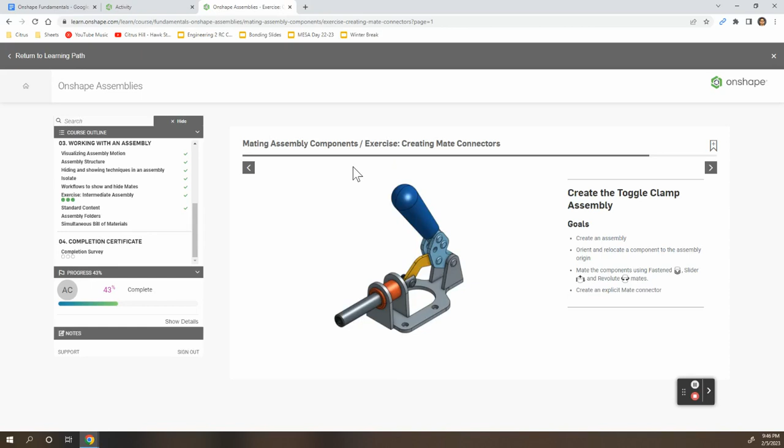So this is our second video for Onshape Assemblies. We're going to go ahead and create this clamp right here. And this is our exercise at creating mate connectors. For step one, go ahead and click on this link and make a copy of this document. For step two, we're going to go ahead and click on this icon here, and then we're going to create an assembly. So let's click on here, insert new element. We click on create assembly.

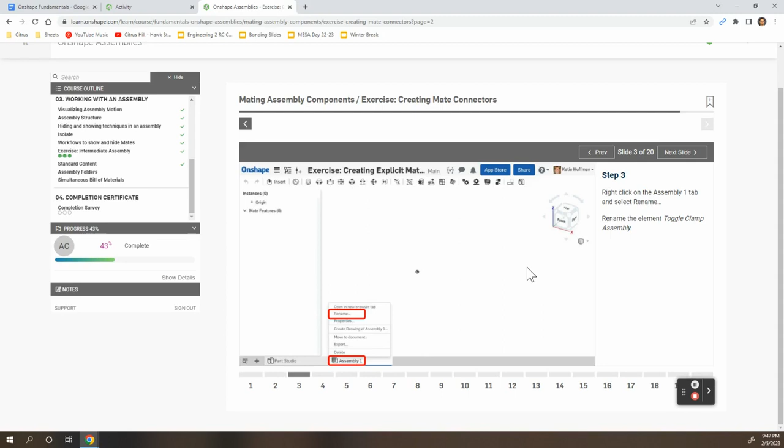For step three, we're renaming this assembly to read toggle clamp assembly. So right click on assembly one, click rename, and type out toggle clamp assembly.

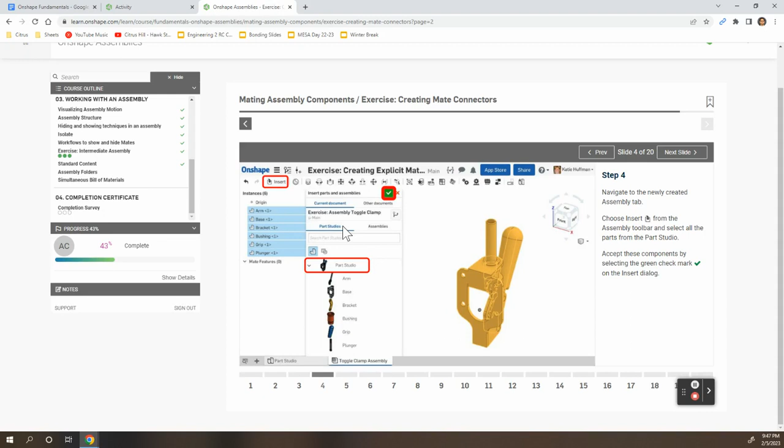Step four, we're inserting our part. So go ahead and click on insert and click on part studio. Now we're going to accept by clicking this green icon here. By clicking on the green icon, our objects will be placed just like how they're placed in the part studio.

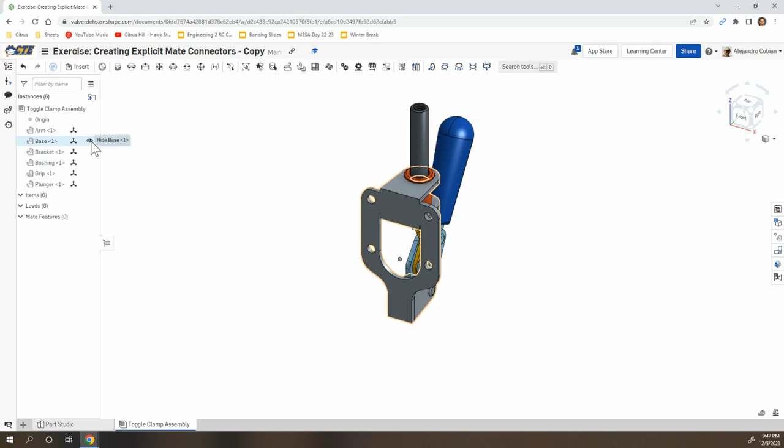For step five, we're going to place this triad manipulator right at this location. So if you want, you can hide everything else by clicking on this eye right here, but we want to do the base, so I'm not going to hide anything else, so we're good to go. So you're going to click and hold onto this circle and drag it around to one of the edges. You're going to hold shift, and then you're going to move the icon down to this location here.

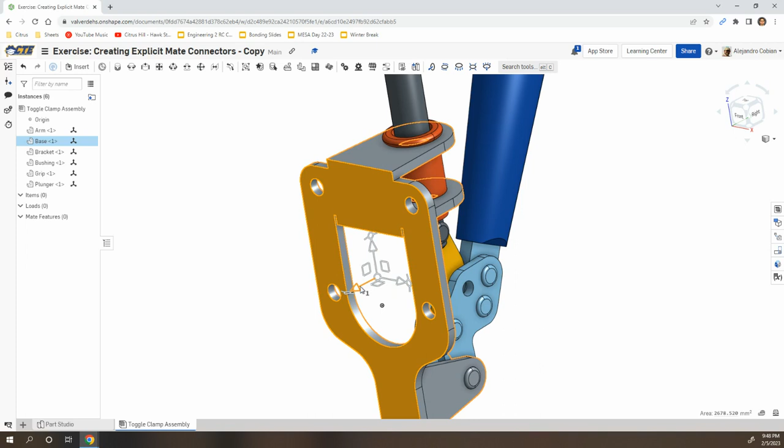For step six, we're going to right click on this arrow that is pointing away from the face of the base. So this is pointing towards the front. So right click on this. In this situation, we're going to make sure that our arrow is going to anti-align with Z. So click anti-align with Z. This is now our top face of the base. Now this is the bottom face of the base.

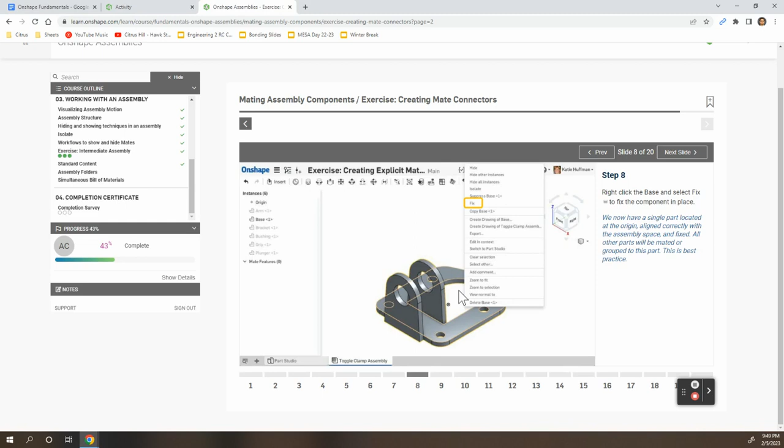For step seven, we're going to click on the circle, right click, select move to origin. For step eight, we're going to click on the base. So right click on the base and select fix. So at this point, we can move every other component. And the only one that we cannot move is this base here.

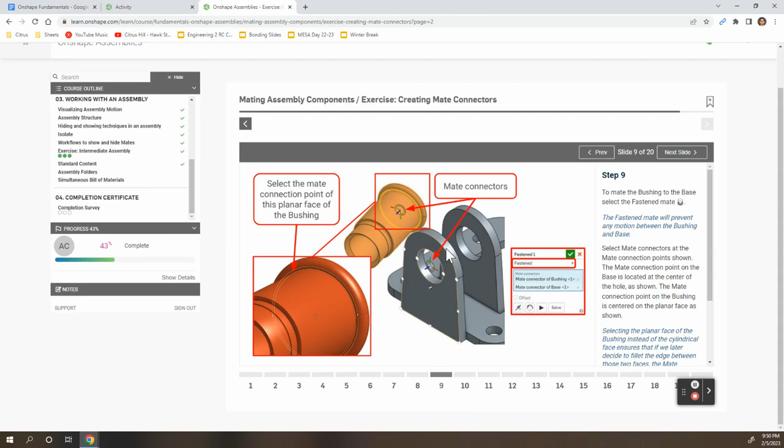For step nine, we're going to place this orange piece right inside of here. So this is our bushing, and we're placing it inside of the base. So let's zoom in into our bushing. So what we want is to select Fastened mate. So let's hover over this, hold shift, and then click this icon here.

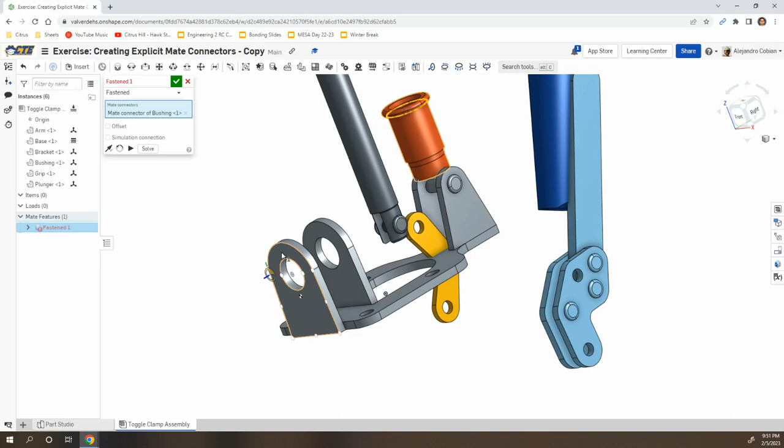Now we're going to go in this area here. We're going to hover over this face, hold shift, and we want to place our mate connector here. So in this situation, we want this bushing going towards the inside, so let's just flip it and accept. So now we're good to go. So for step 10, notice I just had to flip it, and we're good.

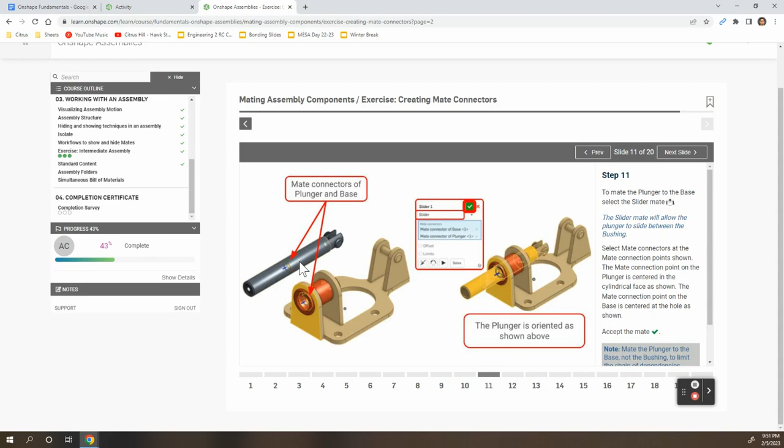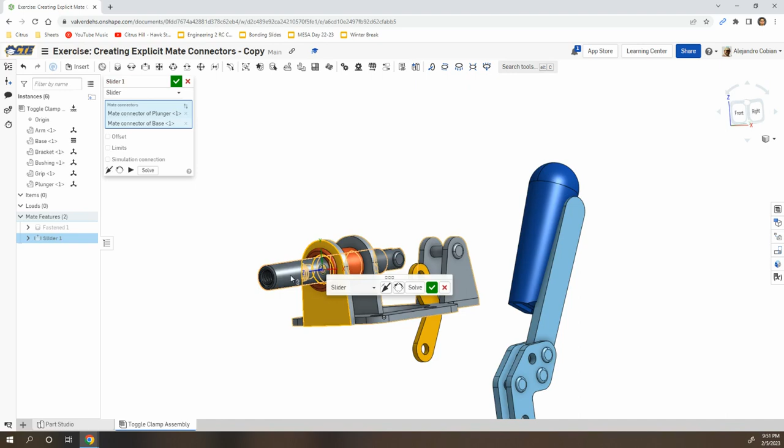For step 11, we're using a slider mate to connect this cylinder inside of our bushing. So at this point, let's click on slider mate. So we're going to select this centerpiece right here. And now we're going to hover over this base here. When we hold shift, notice that I'm on the base and not on the bushing. And I go in the center right there. And then we accept this mate.

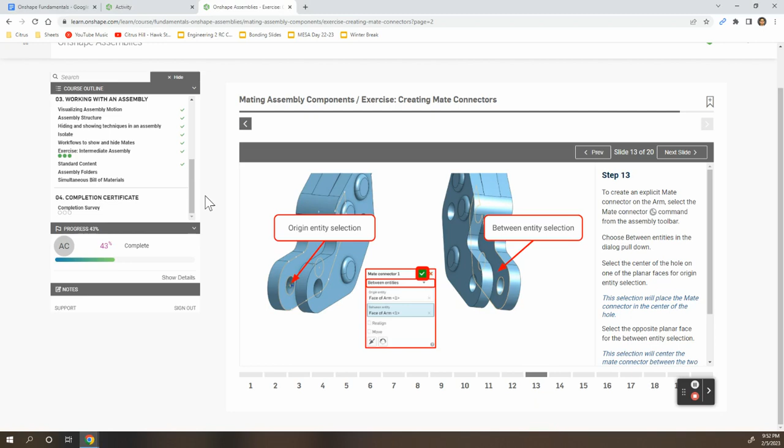For step 13, I'm going to place a mate connector at this location right here. And then I'll use that mate connector to connect this handle onto our base. So to do this, we're going to select mate connector. So click on mate connector. Let's rotate. We're going to look at this piece here. We're going to select between entities. So change this to between entities.

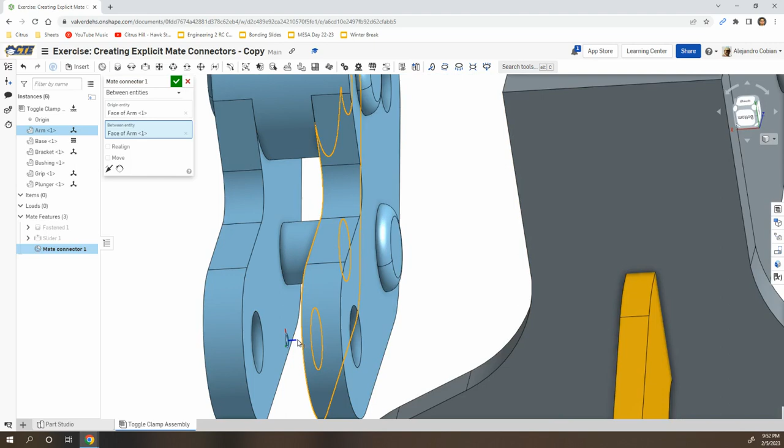Our origin entity will be here. So hover over this face here, hold shift, and click on this area here. And our between entity will be this face. So notice our mate connector is centered between those two holes. And then go ahead and accept.

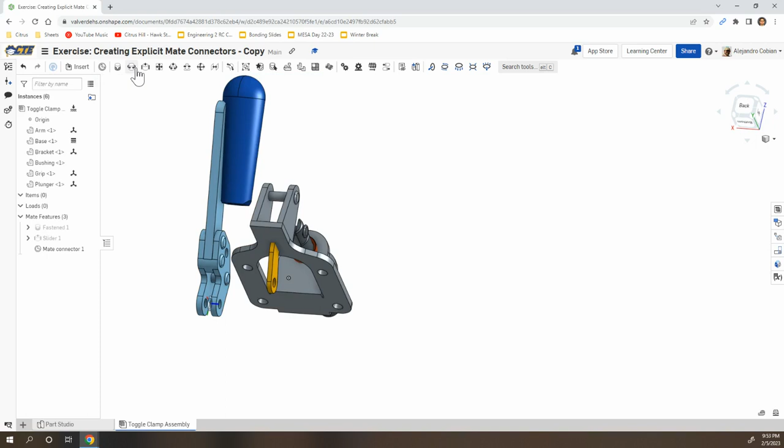For step 14, we're going to use our previous mate connector that we just made and our revolute mate to connect this blue handle to our base. Let's go ahead and select revolute. Let's click on this mate connector. Let's make sure we select this mate connector. Notice it reads mate connector 1 of arm 1.

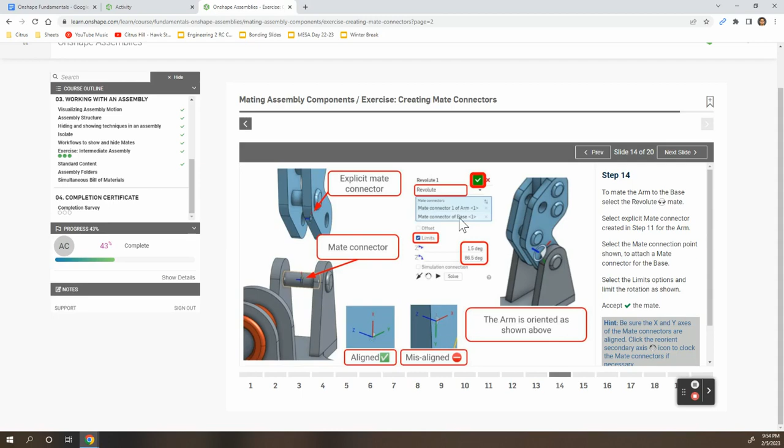And now we're going to place that on this cylinder right here. So we're going to add these limits right here. Click on limit, place a value of 1.5. And for our other limit, we'll have a value of 86.5.

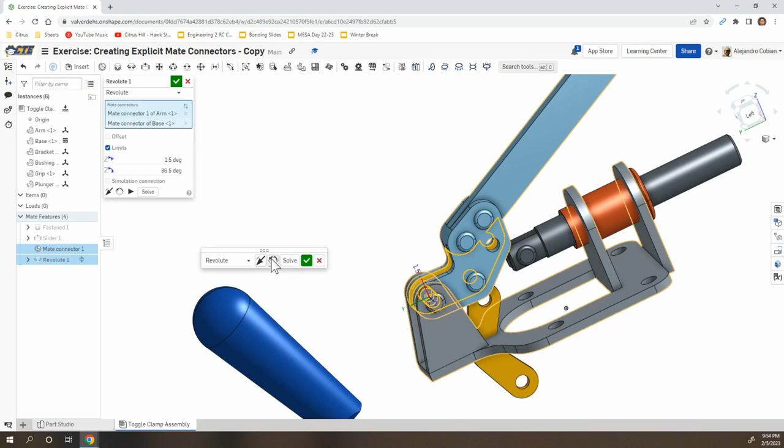Notice it's spinning right here, so we're going to reorient our secondary axis. Let's play it one more time. And this is the correct orientation. So let's go ahead and accept.

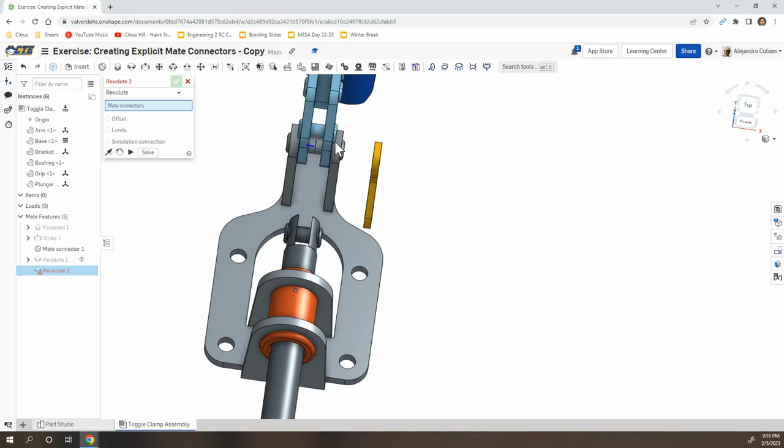For step 15, we're going to connect this little bracket right here to this position here. Keep in mind the other end will be connected to this cylinder here, so don't worry about which end you choose. Either way, it's a symmetrical piece. So let's go ahead and select revolute.

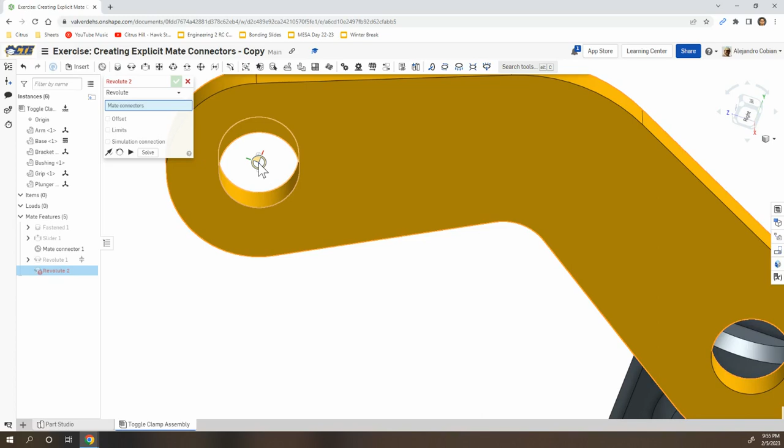So we're still on revolute, and we're going to hover, we're going to zoom in. Make sure we select this face right here, hold shift, and then make sure we select the center icon. Notice there's 1, 2, 3. Let's choose the second little circle. And then we're going to place this right here, right at the center.

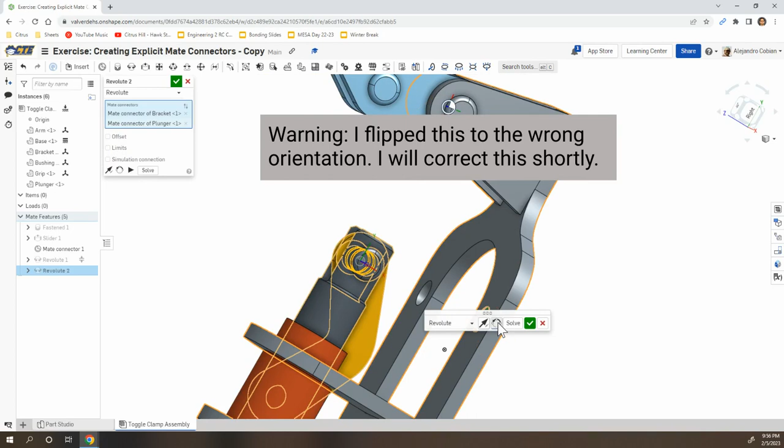All right, let's go ahead and flip this just to make sure we see it in a different location. And let's flip it one more time, just so it's not in our way. We'll leave it here, and we accept.

For step 16, we're connecting the other end of the bracket to our cylinder that's connected to the blue arm. So in this situation, we're still on revolute. Notice I haven't exited out of this.

So let's zoom in right here, hover over this face. Notice we're not here or the edge, we're at the center. So hold shift. Notice we have 1, 2, 3 circles. Click on the second circle.

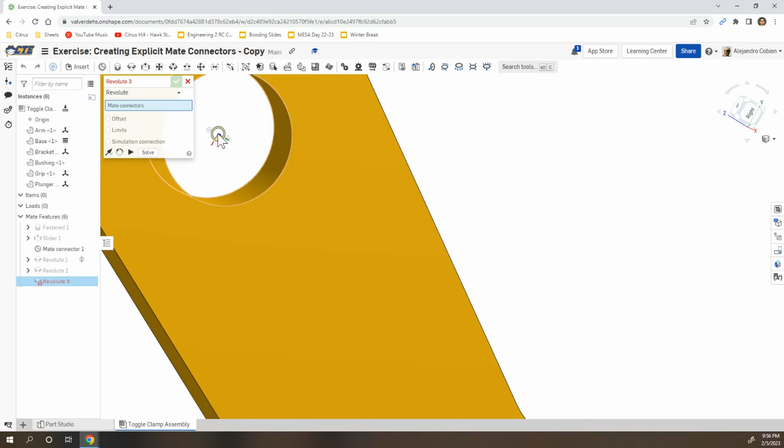Now we're going over to this blue arm. Let's zoom in on the cylinder and let's click on the center. And just go ahead and accept. It looks kind of awkward right here, but just accept it.

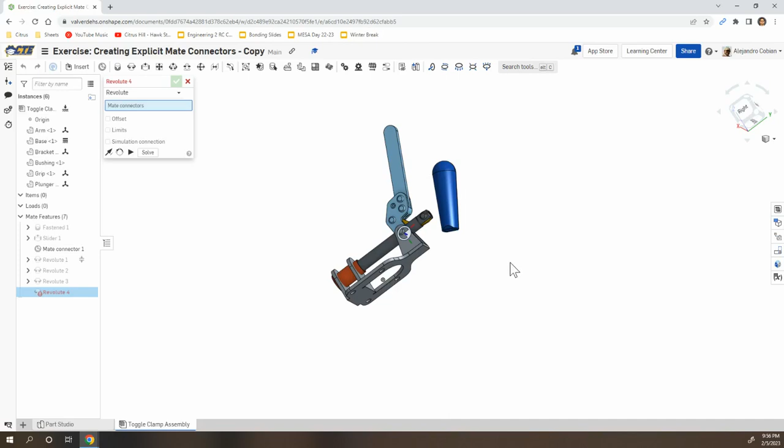There we go. And notice now we can start playing with this. Our cylinder is moving forward and backwards. There's a little bit of awkwardness going on right here. So my device was looking a little awkward.

So what I'm going to do to fix this right here, because this arm shouldn't be sticking out this way, and notice that my cylinder doesn't move back this way. So what I'm going to do, I'm going to go to revolute number 2, and I'm going to flip right there and accept.

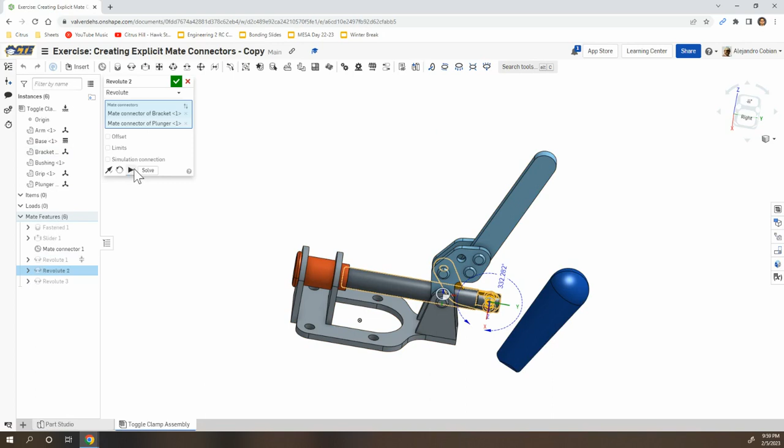Let's try one more. There we go. So now I'm in the correct position. So once again, if it's a little messed up, make sure that you flip this bracket around and it should work better. For step 17, we're using the section view to view the insides of our handle so that we can actually connect this to this bar up here.

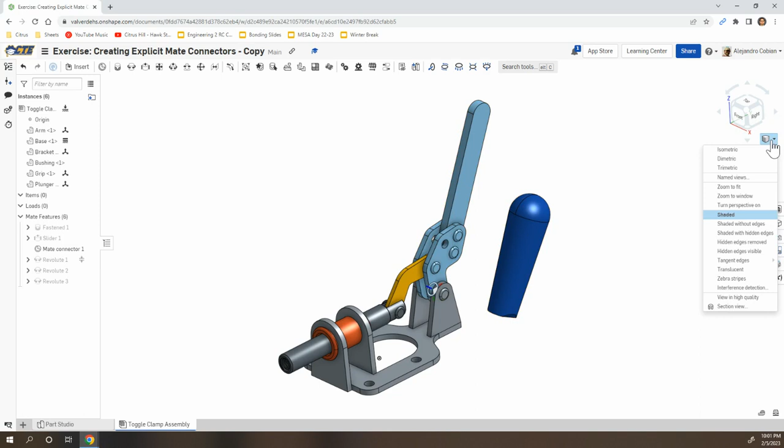So go ahead and open up this drop-down menu here. Click on section view. Click on this icon here. And at this point, click the accept button.

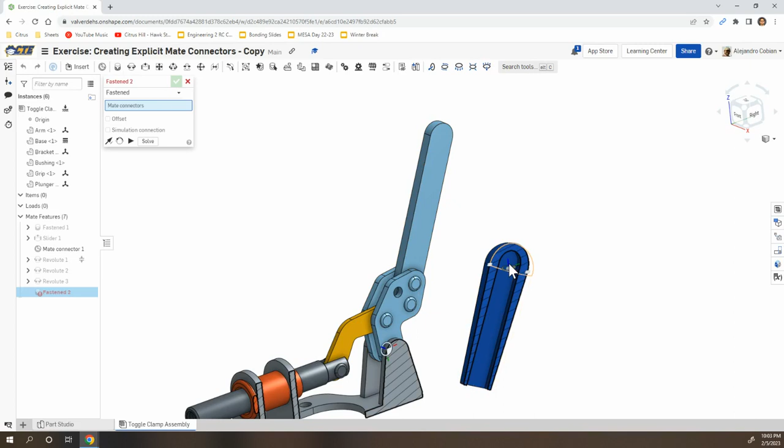For step 18, we're going to use the fasten mate tool to combine our blue grip onto our bar. So now to connect the blue grip onto this bar, let's go ahead and select fasten mate. Let's hover over this icon right here. And let's go ahead and rotate and select this face here. So we're on the left side of our bar, and click there and accept.

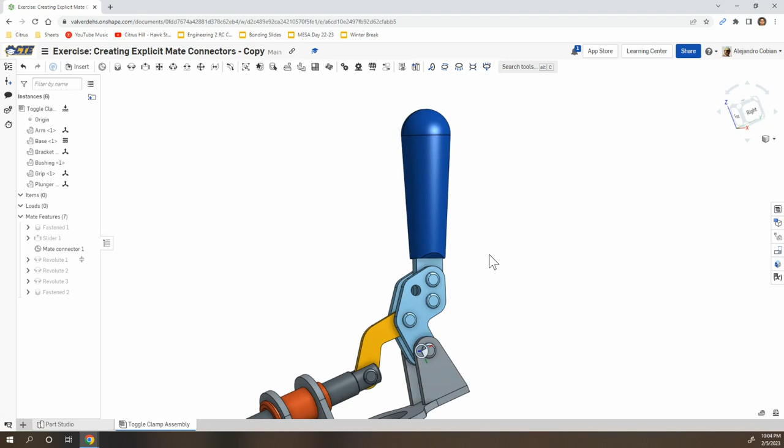So we don't need a third fastened. We're pretty much done. Let's make sure we get out of our section view. So turn section view off. Notice our object now moves correctly.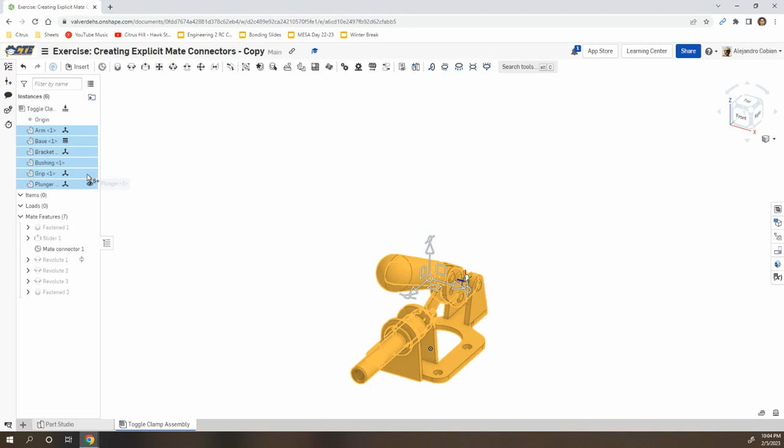For step 19, we're just verifying that we created our object correctly. And for step 20, we're going to go ahead and use the mass properties tools to check our work. To do this, we need to close the arm completely. So go ahead and move this handle back. Select all of your icons here. And then click on the mass properties tool.

So now we're going to go to the self-check. And what we want to do here is only use the Y and the Z values to check our work. So make sure you use the Y and Z. And select the icons that are closest to this. We're a little bit off, but you should get the right answer. Anyways, thanks for watching, and try out the other videos.